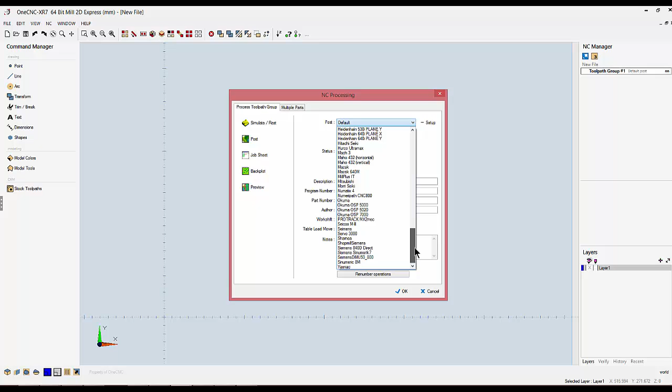If we right hand mouse click on toolpath group, go down to process group, on the top right hand side of that form is where we keep all of our post processes. Everything from Acramatic, Anilam, Bandits, Boss, Fanucs, Hasses, Heidenhains, Hurcos, Shop Mills, Siemens, Mazaks. You just select the post process of your choice and select OK.

You won't notice the post process coming into play until you start looking at your hole operations, when the applicable questions will pop on the screen for your canned cycles.

OneCNC is broken up into three main areas on the left hand side. We have our drawing options along the top section, we have our model tools in the middle, and we have our stock tool paths down below.

There are multiple ways we can work inside of our software. We can use our drawing options, points, lines or arcs to create our own drawings from scratch. We can import customer drawings, DXF, DWG files, and put our cutter paths direct around there, or we can input solid models and extract the edges from the model and put our cutter paths around there.

So we'll start off with creating a drawing from scratch.

OneCNC has a powerful suite of drawing options, from points, where you can create points at arc centers, points along a chain, lines, which will allow you to do horizontal lines, vertical lines, angled lines, tangential, rectangular, parallel offsets, sketch lines or chamfers. And we have arcs, which will allow us to do full circles, arc sketching, arc through 2 points, arc through 3 points, fillets, ellipses, helixes, optimized lines, cardinal splines, B-splines and Bezier splines.

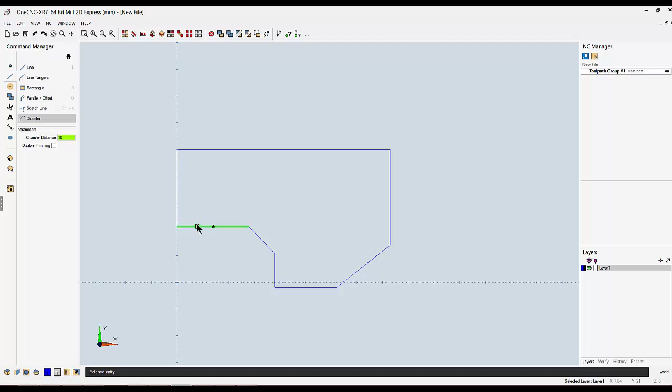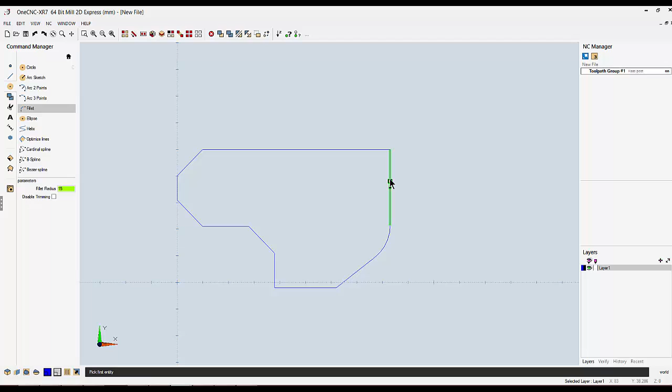As you can see, it doesn't matter whether you work counterclockwise or clockwise. Let's put a few fillets on there. So we're going to arc, fillet, same thing applies. Select the size of your fillet that you want to put on and a preview appears, so you can obviously preview what it's going to look like before you left click to select it. Very quick and easy functions to put fillets and chamfers on.

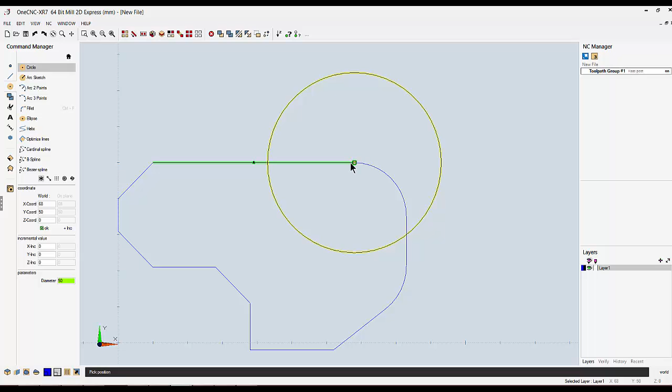When you're working with points, lines or arcs, OneCNC has an intelligent cursor as well. So you can snap to the beginning of lines, you can snap to the middle of lines, you can snap to the end of lines. If I just drop an arc over on the right hand side, just change the radius a bit, you can also snap to the 4 quadrants of the circle. So it makes geometry input very quick and very simple.

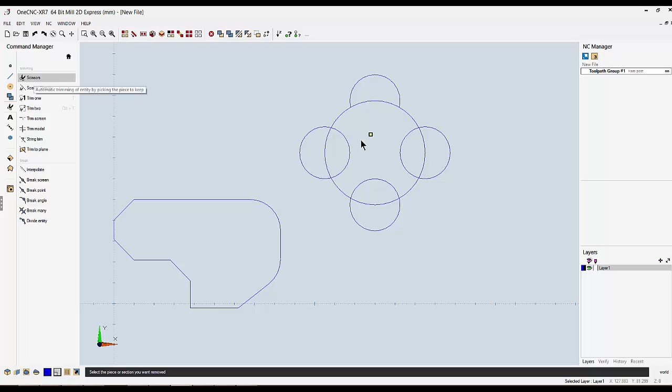Also with our trimming options, several different options available: scissors, scissor sketch, trim 1, trim 2. I'll just use scissors just to trim these arcs back to the nearest intersect point. As you can see, you can create quite complex geometry very quickly.

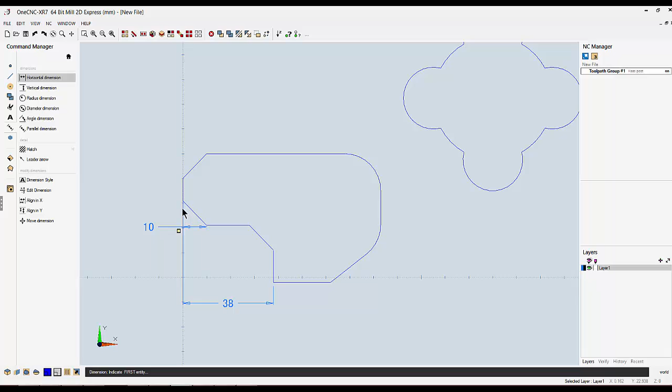So when you've created a drawing, you might want to put some dimensions on there. So go into my dimension options. We've obviously got horizontal dimensions, so you can just snap away to any intersect point. I can just grab hold of the edge of those chamfers as well if I require it. Vertical dimensions.

And radial and diameter, and also you've got angle dimensions in there. So let's just go for a radius.

Now when you've put any dimensions on here, you might want to modify them. You might want to put tolerances on there. So if I'm just going to edit a dimension, let's left click on R15. We might want to put some information after it, so maybe that's typical, we'll just do typ. We might want to change the height of it, so maybe just 2.5.

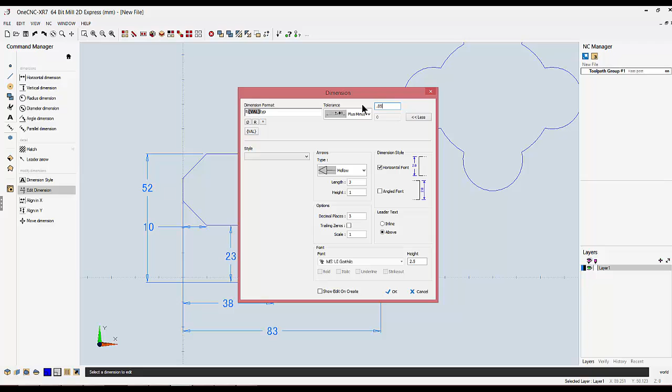And we might even want to put a tolerance on there. So these are our options of tolerances: above and below the line, up and down tolerance, or plus and minus. So we'll just go for plus and minus on this one, and maybe we're going to give it a tolerance of 50 microns, and we can select OK.

So a full suite of drawing and dimensioning tools available. Very quick, very powerful.

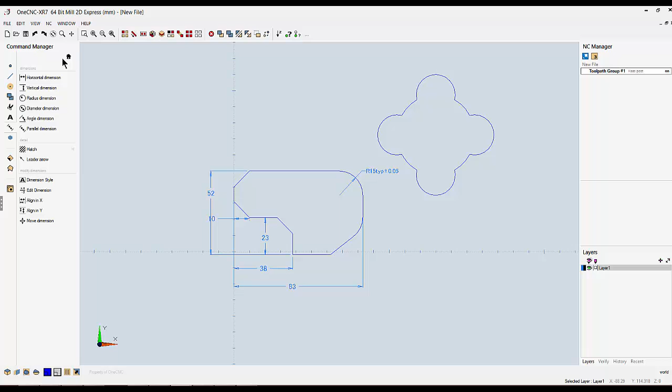Another thing OneCNC comes with is its own library of drawing boundaries. So if we just go into file, we'll bring a file in. As I say, this comes with OneCNC again, all of these files available.

You can import them your own, you can bring these in, you can modify them to suit yourself. And it's just a question of selecting the file size that you want and selecting OK.

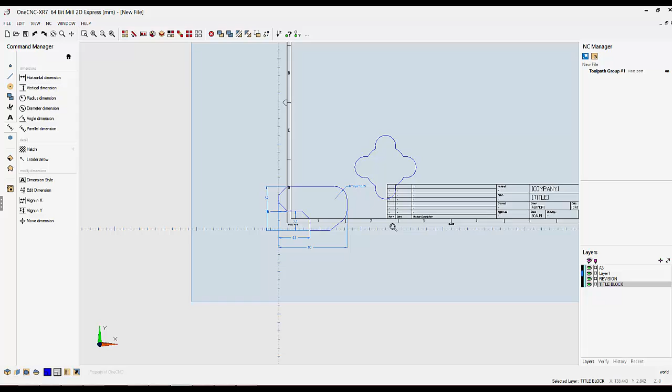We'll just grab hold of our drawing using the color selections. So I'll just grab hold of my drawing, which is in the 2 blue colors, and then we'll just use our transform options and just move that into a more sensible place.

So again, we can modify anything on these standard forms that we bring in. If I wanted to change the title over, I could just go into my text options, I want to edit some text. You simply left click on the title, and we'll just call this one demo for now, and select OK.

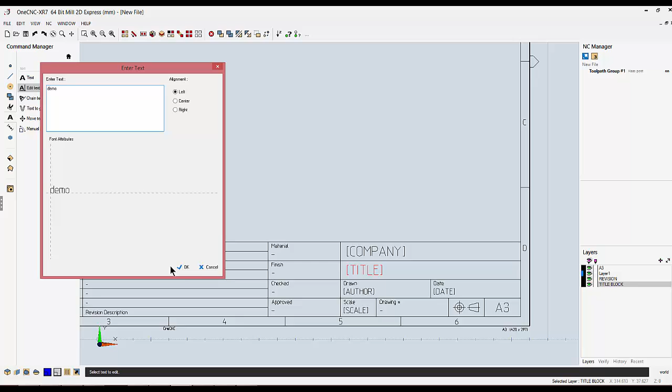Now, as I say, you can fill these in with your materials, your standard tolerances, and you can save them again for use on another part. Or, as I said earlier, you can import a drawing boundary that you already use and drop it straight into our libraries. So very quick, very simple.

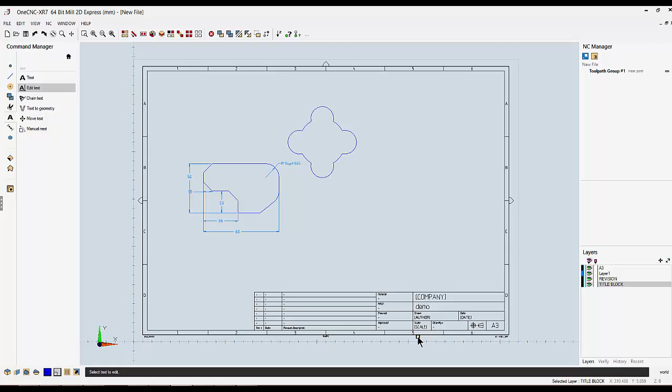So as I said, we can create our geometry using our suite of drawing tools, and we can put our tool paths around there. The other way we can work, or one of the other ways we can work, is import an electronic drawing.

So if we go into Windows, we'll just open up another file, and we'll bring in our customer drawing. So we could obviously put our toolpaths directly around this geometry, obviously providing it hasn't been scaled. In that case, then using our transform options, we could scale it back up.

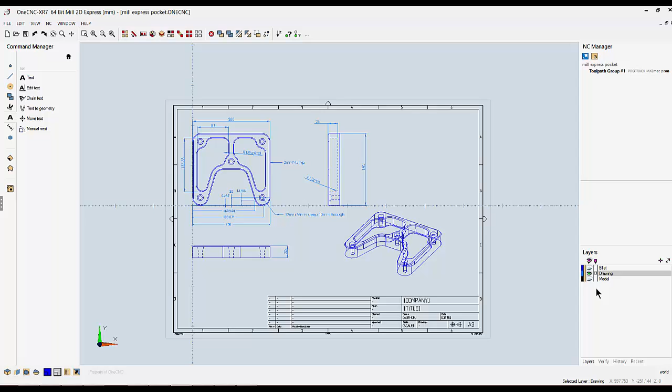Or the third and final way we can work is using solid models. So there we have our imported model that the drawing was taken from. So we'll have a look and see how quick and simple it is for OneCNC to extract the edges of this model and create its own toolpaths.

So as you can see, there are some layers down on the bottom right hand side of the screen. Layers are basically like pages of a book. They're there to make your life easier. The more complex drawings or complex geometry you have on the screen, the chances are that you can pick up the incorrect piece of geometry.

So you can add layers, so you can turn the other things off so they don't get in the way. So I'm just going to add a new layer just by left clicking on the little plus button, and I'm just going to rename this to toolpaths.

Now what we need to do is extract the edges from this model to create our 2D 2.5D toolpaths. For this we use our model tools over on the left hand side of the screen. All I want to do is extract an edge, and I want to extract to give myself a full profile.

So it could be on the bottom of the chamfer, or it could be on the base of the profile. It doesn't matter where you extract these edges from, it's the plane that's sat on the job, which is this XY default plane, that controls the height of the toolpath.

So we're just looking for a full profile. So you hover over an edge and left-hand mouse click. That will then track the geometry all the way around, and I also need the geometry for these two pockets. So again, simply left-hand mouse click and then right-hand mouse click to finish.

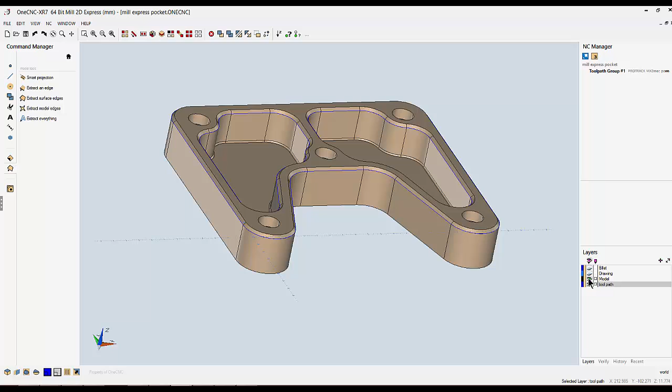So I'm just going to turn the model layer off so you can see what we've just done. As you can see, from a standard plan view, all I've done is create the profiles directly off our customer model. The only thing I haven't done is extract the edges of the holes, though there is a model sat behind here in this layer.

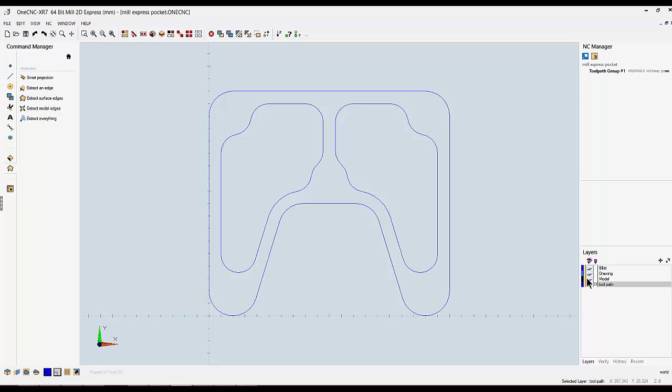OneCNC has an intelligent cursor with a feature recognition system, so it will find those holes for us. I don't need to extract the edge from those holes.

So all we need now is a description of the shape of the billet, and we can use that for two things. We can create a boundary from it to machine any excess stock off the top face, and we can also simulate to it, so we get a very accurate simulation of everything that's going to happen on your machine tool before it even goes out onto the shop floor.

So let's have a look at putting some tool paths around it. We're going to get to our stock tool paths, and I'm going to select facing. As you can see, the prompt at the bottom of the screen is asking me to select the boundary of the face. Well, the boundary of the face is the rectangle, so you simply left-hand mouse click and then right-hand mouse click to accept.

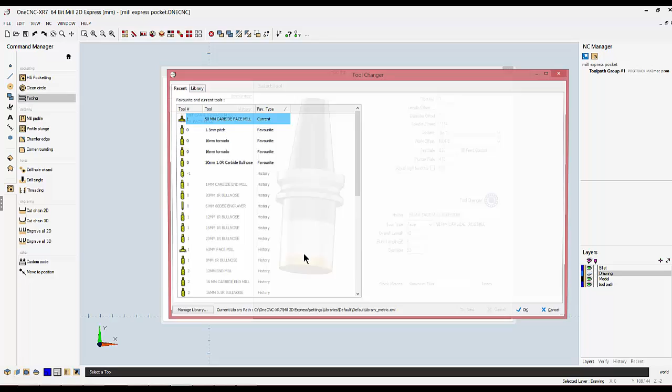Once accepted, it will then take you into your tool selection. OneCNC will also remember whatever tool it used last to do any particular operation. If that isn't the tool you want to use, you simply left-hand mouse click on it, and that will take you into the Favorites tab. Any tool you've got labelled in your library as a favourite, tools you use on a regular basis, you can then pick from here. If the tool you want isn't there, you can simply go into our libraries.

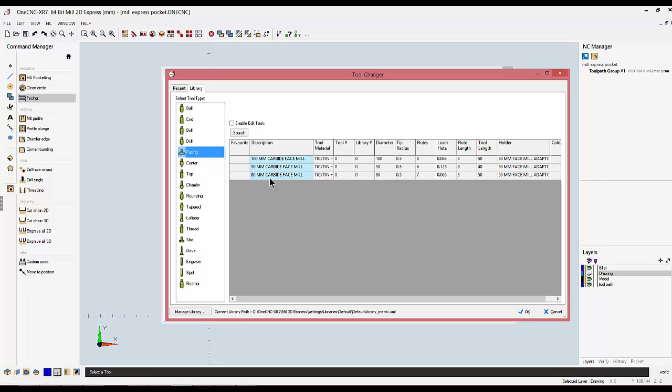Now everything there, from ball end mills, bull end mills, facing tools, threading tools, engraving tools, spot drills and reamers, is completely editable by yourself. You just need to select the style of tool and the size of tool you want to work with. They are very, very simple things to create.

All they need is the material type, a tool number or library number, the diameter and tip radius if it's got one, the flutes and load per flute which OneCNC uses for its feed rate calculations, and then you have flute length, tool length and holder style, which are all completely editable.

You can create your own holders, which it uses for collision detection purposes. So I'm just going to select OK.

You'll have seen the speeds and feeds flash very briefly. That calculation has been made with the amount of flutes and load per flute we've set for the tool in conjunction with the stock material.

If we left click on the stock material, everything there from aluminium, brass, copper, bronze, plastics, all the way down to free cutting stainlesses and titaniums is again completely editable by yourself.

You just need to go into enable editing and you'll see the surface speed requirement and the style of tool, whether it's high-speed steel, carbide, TiCN coated high-speed steel, TiCN coated carbide, cobalt, ceramics, diamonds, taps, drills. You basically select the one of your choice and select OK.

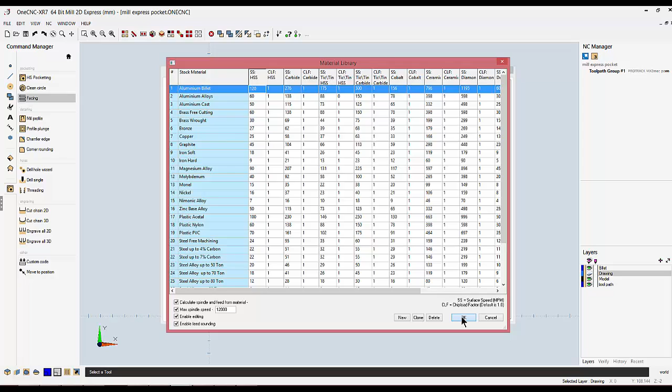Now, just because OneCNC's calculated them out, if you're in a bit of a rush and your libraries might not be set 100% correctly, you can obviously override any feed rate or any spindle speed.

So we'll give it a tool number. Coolant options, none or 1 through to 4, all controlled by post processors. 1 is generally an M08, 2 through spindle coolant, 3 and 4 could be air blast, oil feed, whatever options your machine's got available. So we'll just go with coolant number 1.

Work offset, G54 through to G59 as standard. If you want to use extended offsets, you might want to work with G54.1, G54.1 P2s. You can type in any work offset of your choice. If you work with Heidenhains, you'd be typing in H values. So I'm just going to stick with G54 for this one.

You'll see a fair few toolpaths in our system that have this adjust high feed rate option.

And what that's telling you is when the tool leaves the material boundary to take another cut and all it's doing is changing position, it's not going to go into a rapid move. It will only go into a rapid move if it lifts off from one side of the job and rapids over the other to carry on machining.

So the way to use it is to stick in a box, type in the maximum feed rate of your machine in millimeters, which might be 20 meters a minute. So we'll just type in 20,000.

Each toolpath has an option for notes. Notes will allow you to type in insert grades, any specific information you've got for the setters, maybe sticking out a certain length, using certain form tools. Whatever you want to write in there is visible on your job sheets. So I'll just close it down.

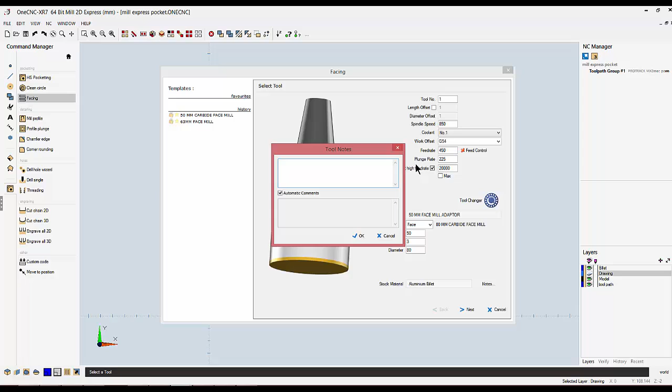And we'll select next.

You get a dynamic view of your drawing to help you out with the start and finishing clearances. Obviously, anything you type in here, the applicable boundary will give you a visual representation of where it is your tool's coming into. So, rapid plane in Z.

How close do you want to rapid off the top face of the part? I'd be quite happy with 10 mil just to start off with. Your plunge clearance is an incremental distance above your material top, and your material top is how much stock you've got to remove off the top face. So we'll just say we've got a couple of mil.

And final point in Z. If you want to leave stock on to go over with another tool afterwards, 0.2, 0.3 of a mil, you type it in there. Just for this example, I'm going straight to finish. Retract at feed speed. Now I want to rapid out.

And material top from geometry doesn't come into play because 3-axis machining, you're plane set on the top of the job, everything is minus. Cut control.

If you remove the tick from the box, it'll take one cut. If you put a tick in the box, if you want to go down in depths, maybe you want a roughing depth of 1 mil, so it'll take it off in 2 hits. And we can select next.

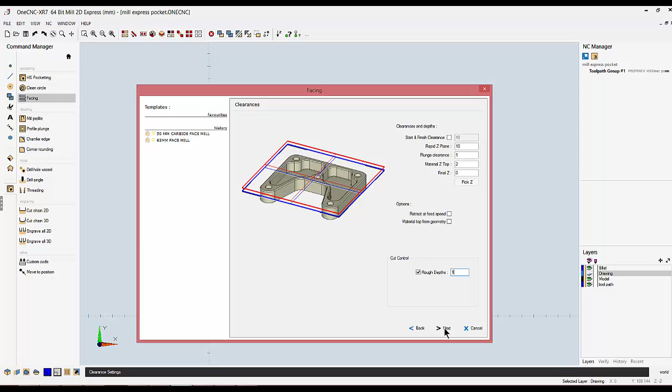Okay, so the approach distance. How close do you want your tool to come in off the boundary? Well, we've set 110% as standard, so the tool is going to plunge in off the boundary of the material, which is great. I don't want it plunging onto the top face.

Overlap amount, if you want the tool to feed all the way off the boundary before it changes direction, again 110%. Toolpath angle, 0 is along the X, 90 is along the Y. I'm just going to go with 0.

And then you have a step over distance. Obviously dependent on your depth of cut, I'd be quite happy with 60-70%. I'm only taking a shallow cut, or you can untick the box and type over a physical step over distance in millimeters.

Toolpath style will allow you to spiral from the outside of the billet to the inside, zigzag from left to right, bottom to top, corner to corner, depending on what toolpath angle you've got set, or one direction. I'm just going to work with the zigzag for this. So I'm going to press finish.

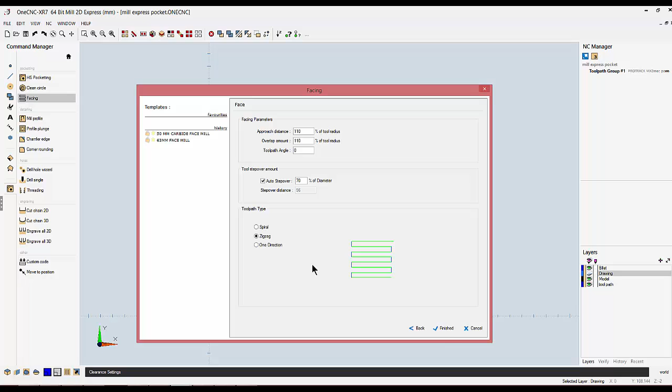And there's our first toolpath on the screen. If I just rotate it around a bit, left click on facing, you'll see the tool is now doing its 2 depths of cut and this blue link line between the green cut lines. As I've told the tool it can leave the boundary by 10% of its tool radius, is where it's going into its high feed rate move.

Now if I just go into edit on this toolpath, you'll notice something else. Each time I create a toolpath, it provides me with a template. Now this is a template that you can use if you have a family of parts, similar parts. So if you use the same diameter tools, the same depths of cuts, speeds and feeds, rather than create that again from start to finish, you can simply left click on the 80mm carbide face mill, which is what I've just created. You can also customize them and name them yourself, which we'll have a look at a little bit later on. So for now I'm just going to close that form down.

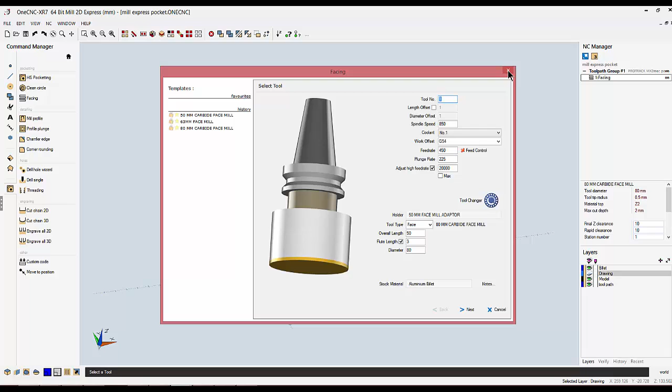Okay, so let's have a look at machining this outside profile. For this one we're going to use high speed pocketing. Again, the prompt down the bottom, we can select the closed or open boundary. Well, the open boundary is going to be my material stock, and the boundary, the island, is going to be the main profile. So we right click to finish.

And what we'll do is we create a template for this one in our favorites.

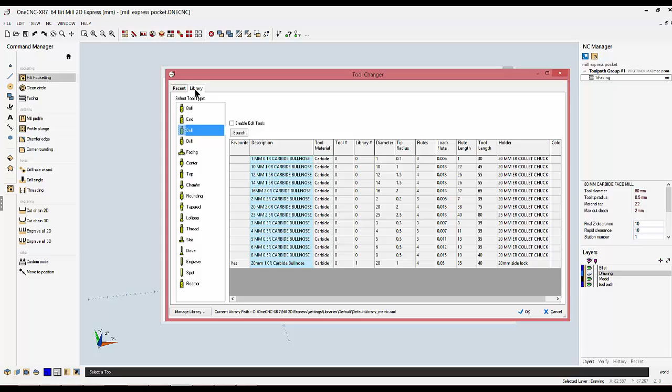So I'm just going to save the setting, and let's call this one 20mm diameter, high speed open, and select OK. We're going to change the tool over in the libraries and grab hold of a bull end mill with a 20mm diameter.

Any tool you bring in from the library, you can modify. So maybe I just want a 0.5 radius on the end for a bit of strength. If it's only sticking out 50mm long, for collision detection I can change all of these. So we'll give it a new tool number.

Quite happy with speeds and feeds, and you'll see a feed control option. That is the most restricting part of any toolpath. You might be able to run at 1 meter a minute on the linear moves, but have to slow down to 200 or 250 millimeters a minute in the corners, so it doesn't squeal.

This allows you to look into the corners at a given distance, either by a percentage of the tool or manually in millimeters. I'll go with 25%, and it'll allow you to slow down on certain size arcs, again either by percentage of the tool or by typing in the radius you want to look for. If I could run at 1 meter a minute on linear moves but had to slow to 250 millimeters a minute into corners, that's a reduction of 75%.

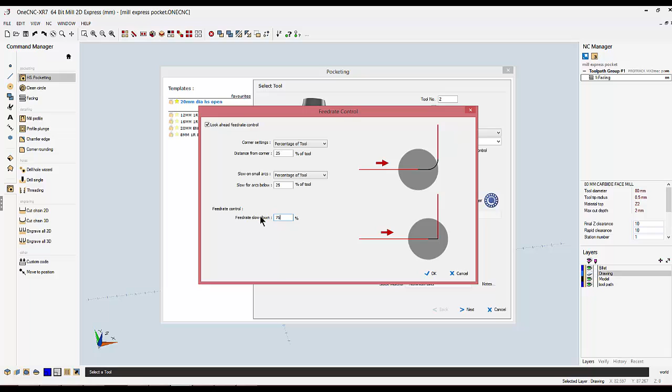So we can select OK. As I said, I reckon I could get away with 1 meter a minute on the linear moves, so we can select next.

Rapid plane in Z, I'd be quite happy with a couple of mil. Plunge clearance, quite happy with 0.5. Material top is 0. Final point in Z, if we weren't sure, we have a solid model sat behind in the background, so I can select Pick Z.

I can find an anchor point at the bottom of the model and left click. That's telling us we're at -30. I've got a bit of a protective edge on this tool, so I'm just going to override that and go to -31, and I'm going to select next.

We can stay with inside the boundary with high speed closed, or start outside the boundary with high speed open. Traditional is a style of toolpath you'd normally get pocketing on a conversational unit, and you also have a high speed zigzag. So we're going to go with high speed open.

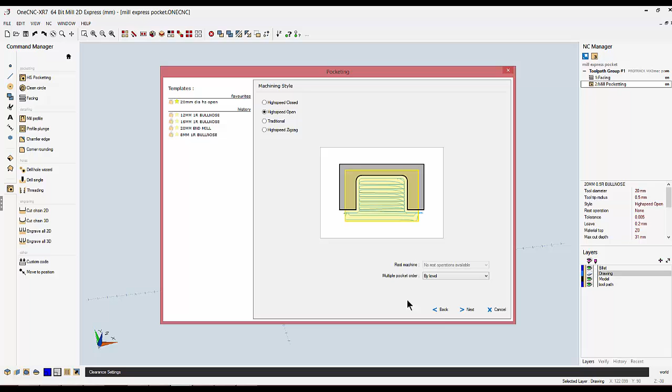Do I want to leave anything on the sides? Well, yes, because I'm going to go around with a finish pass afterwards, whether with the same tool or a different tool, but I want to leave stock on there. Tolerance of the toolpath is fine with 5 microns, and if you have a draft angle on a part, you can give it a wall taper.

So I'm just going to select finish. Give it a few seconds to calculate out the toolpath, and you'll see the tool is radially moving in at its 20 to 30% radial engagement, which I've given it. Again, the blue link line in between the green cut lines is where the tool is going into a high feed rate move.

So let's have a look at machining these pockets. I'm going to go with high speed pocketing, select both of these boundaries, and right click. Again, I'm going to create myself a template for this one, so I'm just going to tell it to save the settings.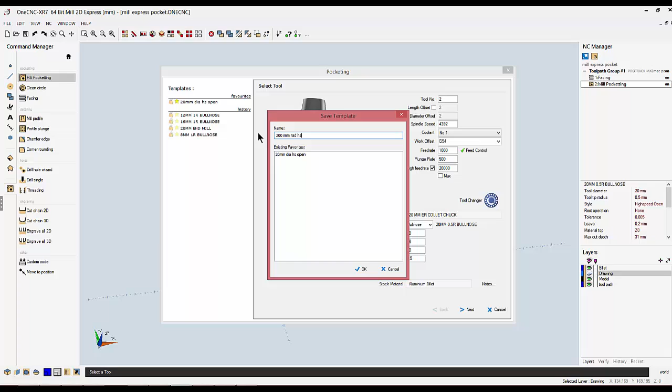Again, I'm going to use a 20mm tool, this time with a 1mm radius, and I'm just going to call that high speed closed, and select OK. So we can give it a new tool number, and just modify the radius on the front page to 1mm.

Quite happy with the speeds and feeds, so I'm going to select next.

Final point in Z, just going to use Pick Z. Find a base of the pocket at -25, and we can select next again.

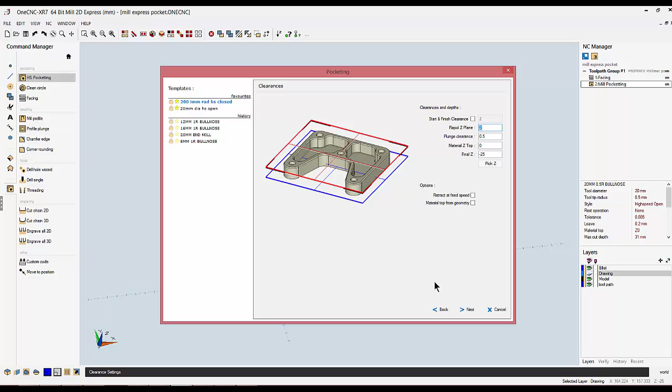This time we work into closed, stay inside the boundary. You can plunge or you can ramp.

Well, if you've got a pre-drilled billet, been out to heat treatment possibly, or a casting where you've got a specific place you want to start in, you can use plunge, and you can force the machine to take an entry position of your choice. I'm going in with a solid part, so I'm just going to get OneCNC to sort it out itself.

Again, if you want a ramp helix, you can force it to start in a position of your choice just by drawing an arc on the model where you want it to start.

Ramp angle, be quite happy with 3 degrees. Helix diameter, let's say we're going to go in at 15 mil. It gives you a minimum and a maximum diameter, and I normally go about halfway in between.

Step over distance, again, let's say the tool can do 30%. I want to leave stock on the sides, not really leave anything on the bottom, just so you can see the finished profile a little bit easier. And I'm going to select next.

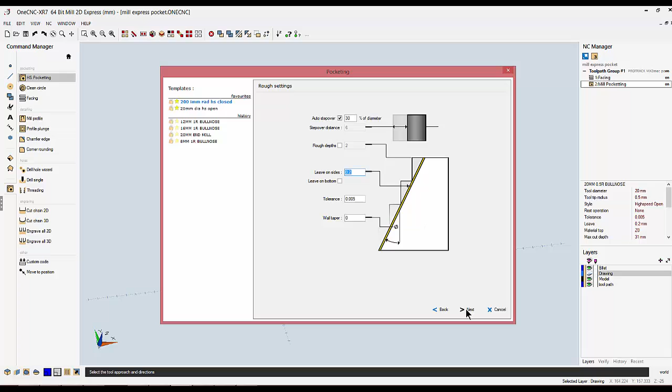Finishing options, as I said, if I want to go around with the same tool afterwards, and why not? Let's go with the same tool. I'm just going to say finish around the bottom only, and compensation, so we've got G41, G42. We're going to use wear away, and we're going to select next.

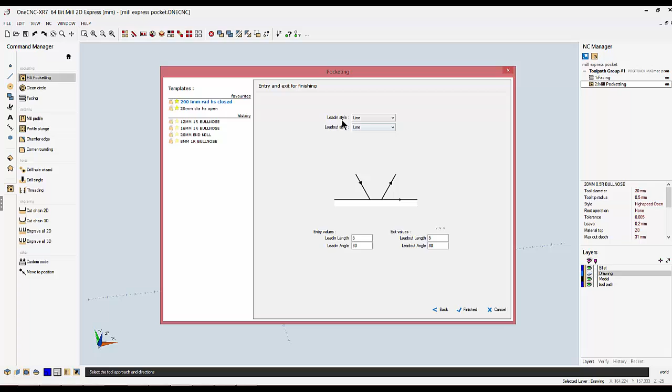Entry and exit, I'm going to use line and arc for both. Lead-in radius, I'd be quite happy with 3 mil. Lead-in angle, quite happy with 90 degrees. Start line length, just a couple of mil just for a bit of safety. And I'm going to copy those over to the exit values, and I'm going to select finish.

Now we have our 2 pockets high-speed machine closed.

So let's finish mill this profile. So we're going to go for mill profile. We're going to give ourselves a start point, give it a direction. That will then track the profile all the way around and take us straight into our tool change. So we're going to change the tool over in the library.

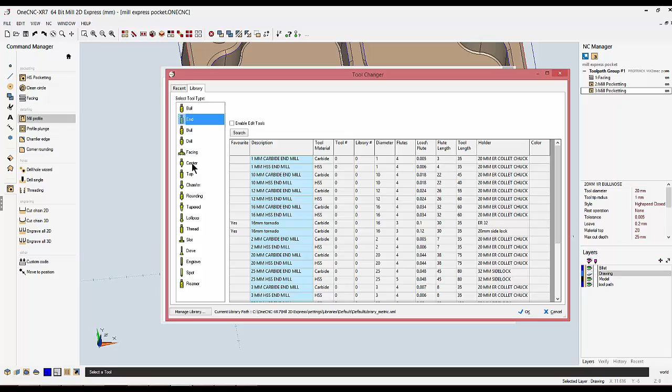Let's say we're going to use an end mill, let's say we're going to use a 16 mil diameter and select OK. So we can give it a new tool number, speeds and feeds.

Final point in Z, again, we could use the Pick Z if we'd forgotten it was minus 30 mil. Maybe just go a little bit past, minus 30.5. And we can select next.

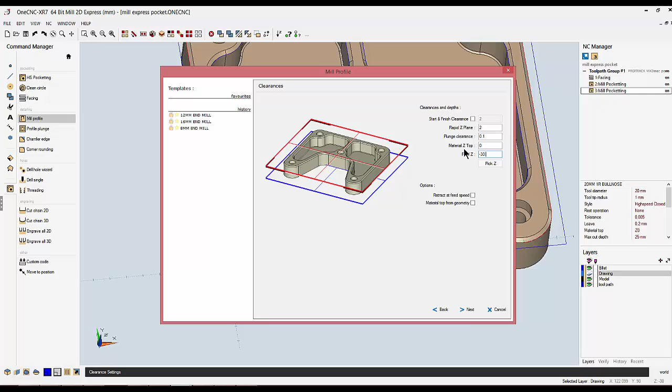Cut levels or ramp, well, I'm coming in outside the material, so I'm quite happy with cut levels. Step over distance doesn't come into play unless you're using remove amount, which is a roughing cycle to take any excess stock away. We've already removed the excess stock with a high-speed pocketing option.

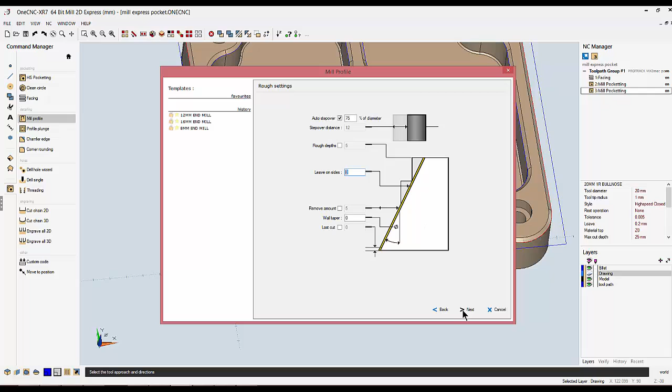So do I want to leave stock on the sides? No, I don't. So next. Finishing option, I've got plenty of flute length, so I'm quite happy at the bottom of the profile, bottom only, and compensation options at control, so I've got G41, G42 cutter compensation.

And next. The overlap amount is a distance from when the tool engages the profile to when it leaves the profile, and that's just to help improve your blend in, blend off. Lead-in radius, again, I'd be quite happy with 3 mil with a 90 degree approach and a couple of mil start line length. So I'm just going to select finish.

So let's have a look at just putting these chamfers on. I'm going to go for chamfer edge. Again, I'm going to select the base of the chamfer, give it a direction with the arrow, and right click to finish. Okay, I'm quite happy with the chamfer tool I've already got in there, so we'll just give it a new tool number, and we can select next.

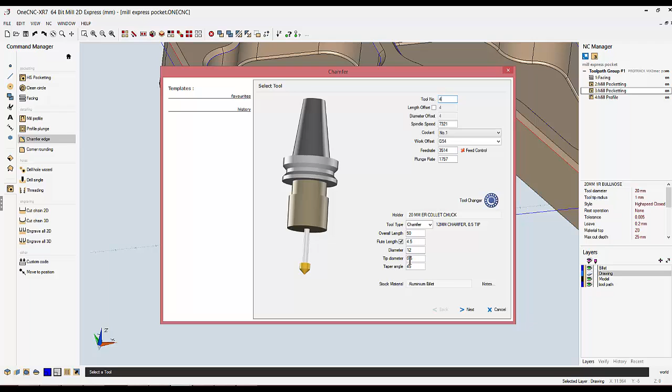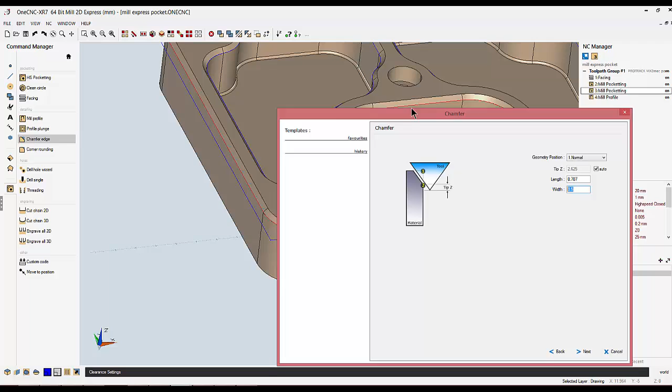Quite happy with the clearance form. And as you can see, you have position number 1 or position number 2. Well, if you're just putting a small breakage on a model that hasn't got a chamfer built onto it, you use position number 1 and you just simply give it the size of chamfer that you need. We're working to an extracted edge off the base of a chamfer, so we're working to position number 2.

So we swap over to bottom, and all we then need to do is give it a distance. You want the calibrated edge of the tool to go past the edge of the chamfer, so we'll just say 1 mil, and we can select next.

Lead in lead out style, be quite happy with line and arc again. Lead in radius, 3 mil, 90 degree approach, couple of mil start line length, and we'll copy those over to the exit values.

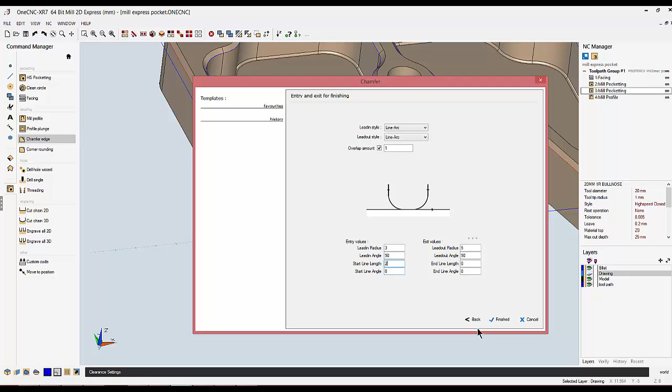So we've had a look at creating templates for high-speed machining and profiling. Let's have a look at creating a template that can be used on another part for doing these 5 holes.

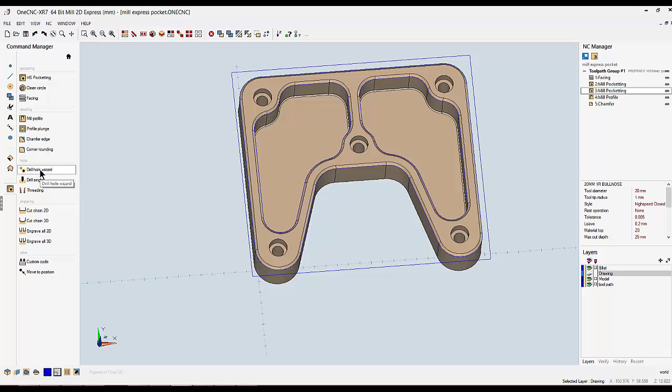Okay, so we're going to go back into our stock toolpath. This time we're going to use Drill Hole Wizard. If I just move that form out of the way, you can see what it's done. It's found 5 holes and two radius in the corners. Well, they're partial circles from geometry, but all we're really interested in is those 5 holes. As you can see, it's telling us it's got a 10mm diameter bolt hole, 8mm deep, down to -30. So what we have there is a counterbore, and the smallest hole is 10mm.

So we're going to accept those holes, and select next. We're not using material from Geometry Top. We'll have a look and see what that does on another sample. I'm just going to turn that off, I'm just working on a flat area. Start point in Z, I'd be quite happy with 5mm. Rapid plane in Z, I'd be quite happy with a couple. Plunge clearance, I'd be quite happy with 0.5. And material top is 0. We can select next.

Okay, so we want to spot drill it first. So I'm just going to left click on center, then double click on center, and we can select our tools. I'll be quite happy with that for the first tool, so we'll give it a tool number. Quite happy with the speeds and feeds, and we can select next.

So you've got machining cycle and automatic drilling. Automatic drilling is G-code output. Machining cycle brings in your post-processor. So we'll have a look at machining cycle. Hole depth, going to use absolute. I just want to put a little spot in there, so we'll just say -3mm, and select next.

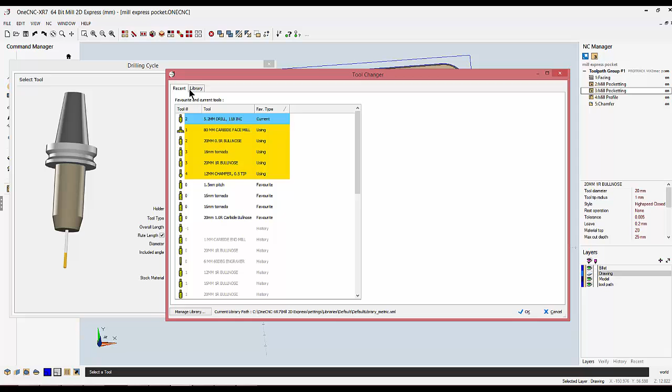Okay, so I want to drill it next. So I'm just going to change the tool over in the library. Let's grab hold of our 10mm drill and select OK. Give it a new tool number. We're going to use machining cycles.

Still working absolute. The part is 30mm thick. May have 3 or 4mm in the vice jaw. Probably want to go all the way through it. So let's say the billet's 35mm. I'm just going to say -35. That is the point depth, as you can see from this little icon. If I want full diameter drilling, the option to drill through at 35mm, you just put a tick in the box. You'll see the icon change. You're now doing full diameter drilling, drilling through full diameter at 35.

I'm going to let this drill peck, so I'm going to use a G83. Peck depth I'm quite happy with, say 6mm. Retract mode of G98, and finished.

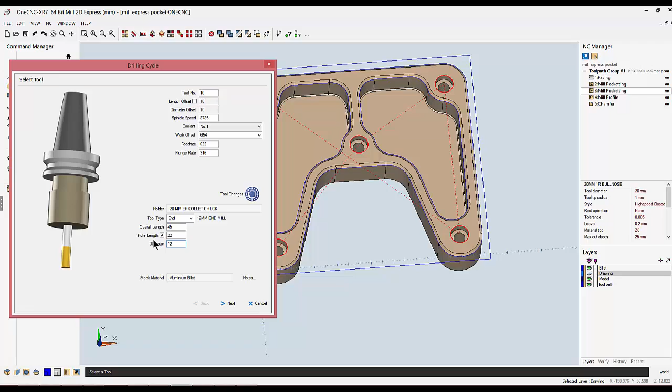And let's just put this counter bore on the top. So I'm just going to select counter bore. I'm going to change the tool over in the libraries. Let's say we're going to do this with a 12mm cutter. So we'll give it a new tool number. Quite happy with the speeds and feeds.

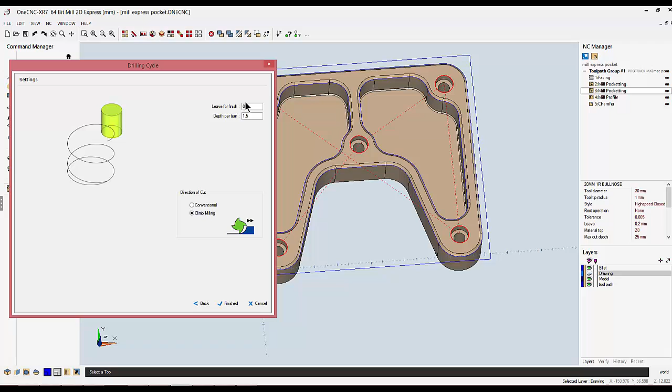And I want to helically mill this one. So we've got a diameter of 16mm. Absolute, we're going 8mm deep, so -8. We're just doing this as a finishing cycle, so I'm going to leave nothing for finish. Depth per turn, let's say 1mm, and finish.

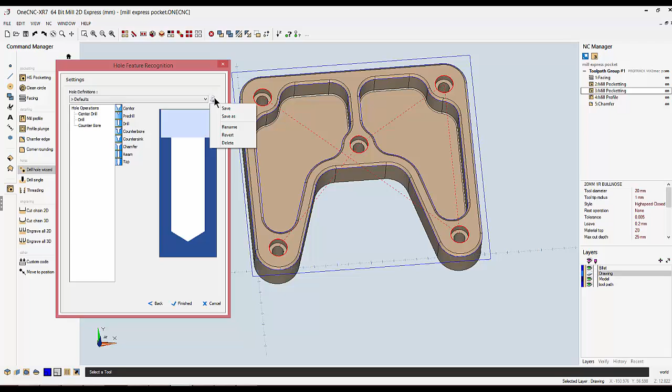You get a cross-sectional view as you're doing this, so you can keep a close eye on it visually. And as I said, we're creating templates, so we can use this on another part. So I'm just going to select Save As, and I'm going to call that 16mm counter bore, 10mm hole, and select OK. That will be in your hole definition, so you can select any previously machined hole from this area, and that will drop it straight into your program. So I'm going to select finish.

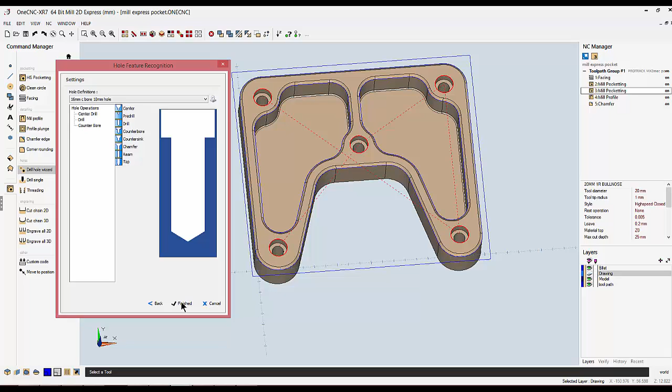So let's have a look at simulation. I'm just going to right click on my toolpath group, going to simulate rest. I'm simulating to a boundary. Top of the job I said I had a couple of mil on there. Bottom of the job we said was 35mm. All we need to do then is select the boundary for the simulation and right hand mouse click.

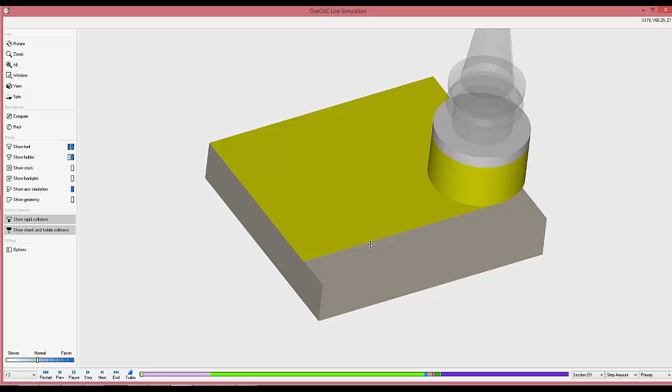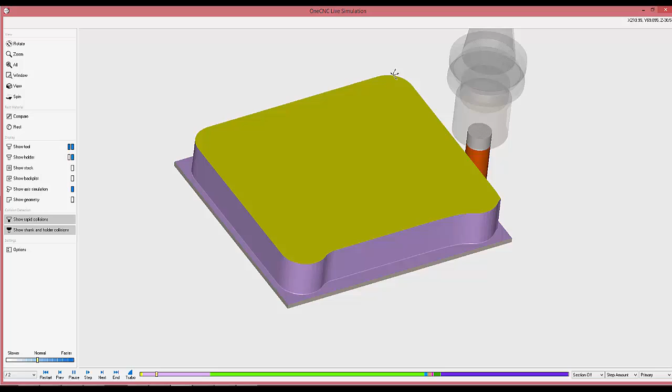Now we can obviously speed the simulation up or slow it down on the bottom left hand side of the screen, and you'll see the tool radially moving in at its 20, 25, 30% radial engagement, whatever you've set. So you get constant load on the tool at all times. You're utilizing the full flute of your tool, so you're not just going around at 5-10 mil, reducing the first 10 millimeters of your tool to nothing, so it either needs chopping off. This way you can send the entire tool off and just have it refurbed. So it's a very efficient way of using your tooling.

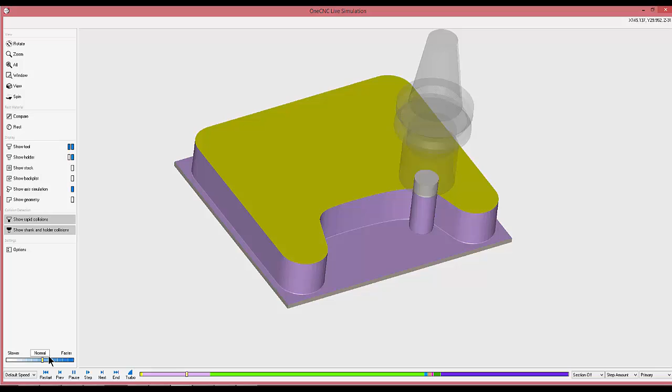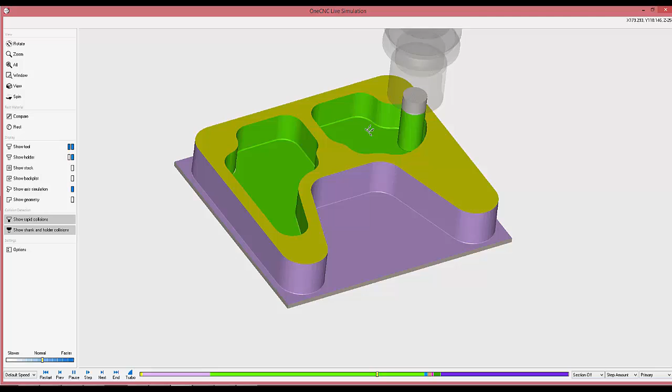The whole thing's being collision detected, the length of the tool, shank and holder. As you can see, it's just radially moving into those corners. Where the tool changes into that light brown at the bottom of those pockets is where it's going into its high feed rate move. It will only go into a rapid move and turn red if it lifts off the pocket and goes to remachine somewhere else.

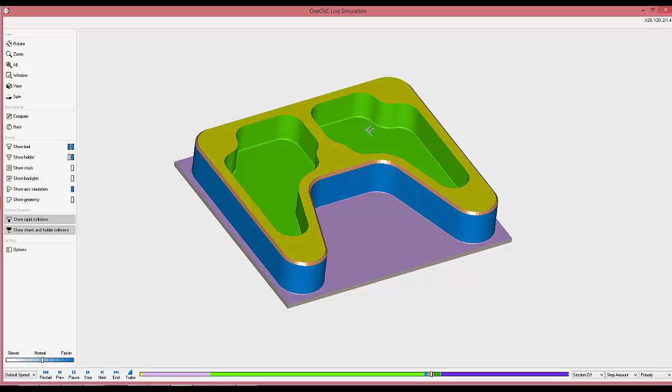Finishing around the pockets and now finishing around the outside profile. Just putting the chamfer around the outside profile. Spot drilling and counter boring those 5 holes.

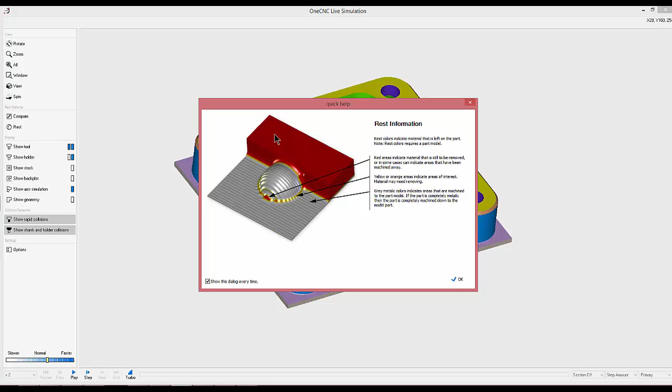When you've got parts with a lot of options, a lot of operations and features, things can get missed. We have an option for rest, and basically rest compares what you've done back to the model you've got in the background. It shows red for an excessive amount of stock left on, yellow - it uses the term areas of interest, meaning not quite right, go back and have a look - and grey is completely machined to model. So when I select OK, it's just going to compare itself back to the model and show me what I've got.

Now, as you can see, I've missed those 2 chamfers. Obviously the bottom of the part is red because that needs flipping over and machining off, but you can see straight away, before this program goes out to the machine, that I've missed something off. So I'm just going to go back and put that right.

Now, editing programs is really very simple. I'm just going to right click on my chamfer option and repick path, then give it the start point again for the outside boundary. I can then pick the inside boundary, both sides, and right click to finish, and now I've got a chamfer going all the way around that part. So the job is now ready to send out to the machine tools.

Okay, so let's get ready to send this out to our machines. I'm going to right click on the toolpath group, go into post group, and we're going to grab our post processor. We initially said that I was going to do this with a Haas machine. Description, we'll just call this one demo. Program number, obviously whatever program number you like. Part number. The author is me, I've logged onto the system.

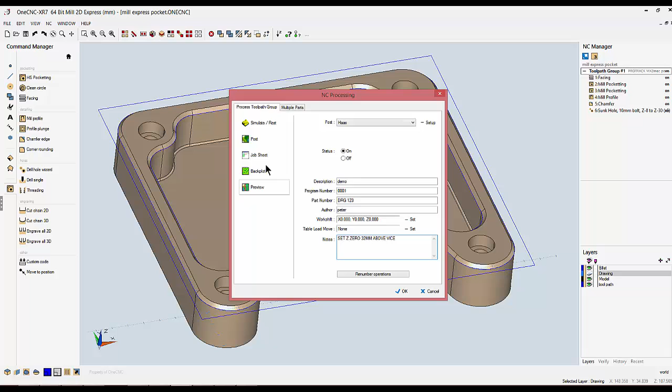And then we just select job sheet. We'll just view that as a PDF so we can go through it.

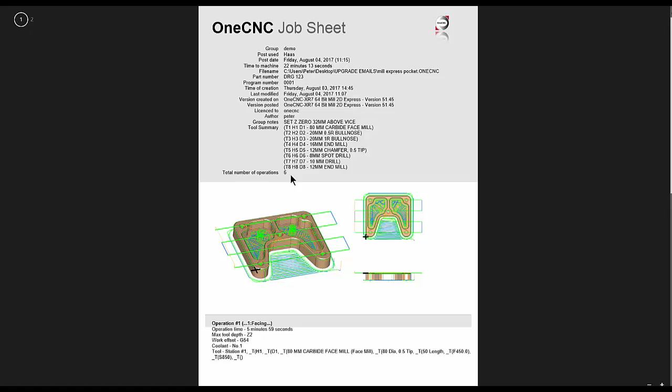As you can see, all the information we put at the top - demo, post, program numbers, drawing numbers - gives you cycle time from start to finish, so it's a good bit for quoting. Group notes, anything you typed in there is visible by your setters or operators. It gives you a tool summary with the amount of operations. If you make a mistake in your tool numbers, it will come up here with an alarm saying duplicate stations are being used. If you then scroll down a bit further, you can see it gives you a crosshair to show you where the datum of the part has been set, along with the model and all of the tool paths going on the part.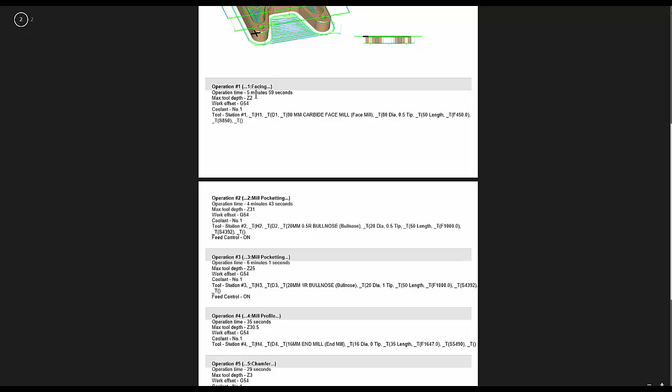As you carry on scrolling down, you can see it breaks each individual into the operation time, the maximum depth the tool is going to be going, the work offset being used, and all of the tool and station information. So we'll just close that down. You can obviously print it off or save it to your customer folders, and we can then post.

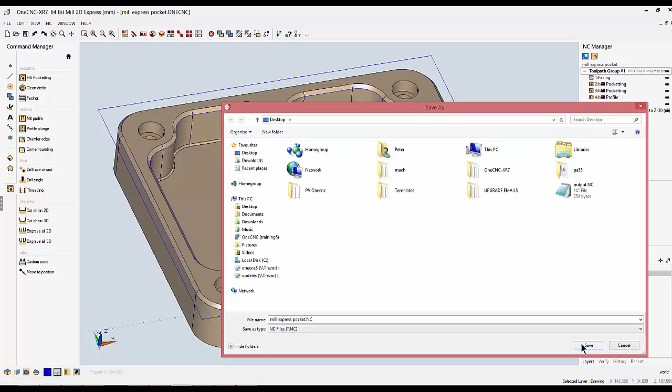First thing you need to do when you select your post processor is just make sure the file extension is set correctly. So as I'm posting out with a Haas, it'll be .nc. You can obviously redirect this program wherever you like - customer folders, flashcards, memory sticks - and then you simply select save. OneCNC will then bring out all of the G code applicable to your machine tool.

So there we have a job from start to finish: importing a solid model, extracting all the edges round, creating ourselves a tool sheet, and visually checking the simulation. So let's have a look how these templates can improve our setup or speed of programming on other parts.

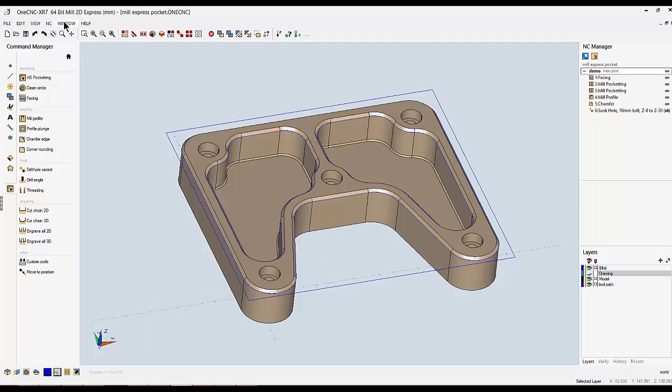So let's bring in a similar part. I've already put some geometry around those parts just for the billet size and the profiles. But as I say, this is a family of parts. They are pretty much the same material and tooling. So first thing we want to do again is high-speed pocketing.

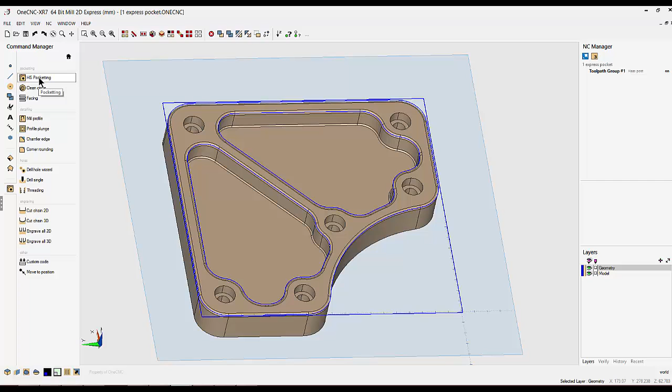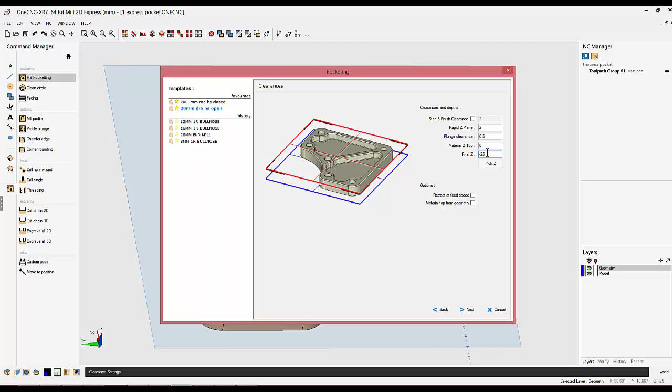So when we select the high-speed pocketing, the boundary and the island, we're now going to use our 20mm diameter high-speed open tool. You see the tool change, all the speeds and feeds. I can just push through this form. I obviously need to check the depth of the profile, so I'll just drop down and check the depth. Slightly shallower in this case, -25, so we'll override it and tell it -25. As I say, all the rest of the information will remain the same. Quite happy with the plunges, quite happy with the speeds and feeds.

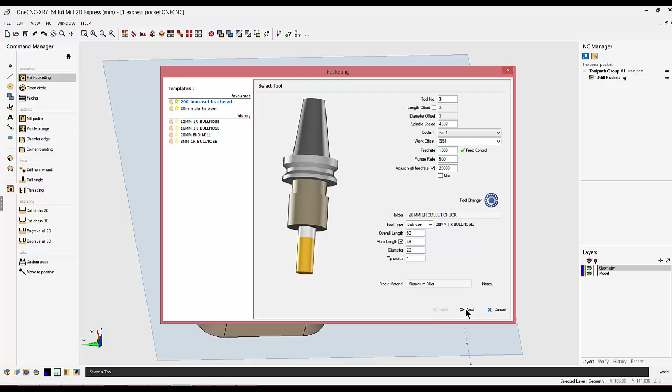So as for the two pockets, we're going to go back into high-speed pocketing. We're going to select the boundaries for the two pockets. We're now going to use the 20mm closed, and again we're going to push through this form, making sure we check the Z depth at the base of that pocket. Slightly shallow again, 15, but apart from that I'm quite happy with all the information OneCNC has been collecting inside these toolpaths.

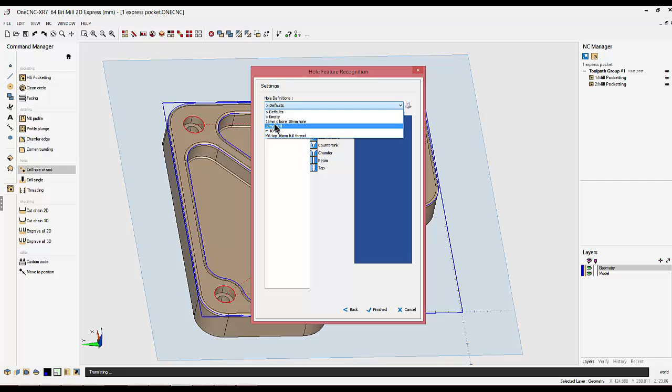And as for the holes, drill hole wizard, you can see the hole size is the same. Quite happy with my clearance form, so I can just drop straight into my hole definitions and select the 16mm counterbore and select finish. And you can see very quickly you are building up a program without any effort whatsoever. So it's making your programming times far more efficient, and with those high-speed toolpaths you will be increasing the efficiency of your machine tools.

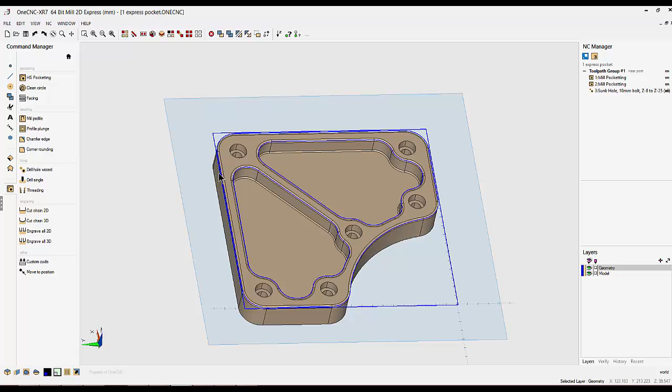Now these holes are all on the same Z level. Let me show you how holes via geometry works. So if we bring in another option, you can see this has got 8 holes of similar size, but they're on different Z levels. When you work with a model without any extracted geometry, you would need to do that in two separate cutter paths, one at the top of that plane and one at the bottom.

The difference is you now use the geometry that you extract off the top of the holes as the zero for the start point of your holes. So we're going to go back into Drill Hole Wizard. As you can see, it's found all the holes in there, 5mm diameter, 10mm diameter, and the 5mm ones on the base. So I now want to select both of those hole types and select next.

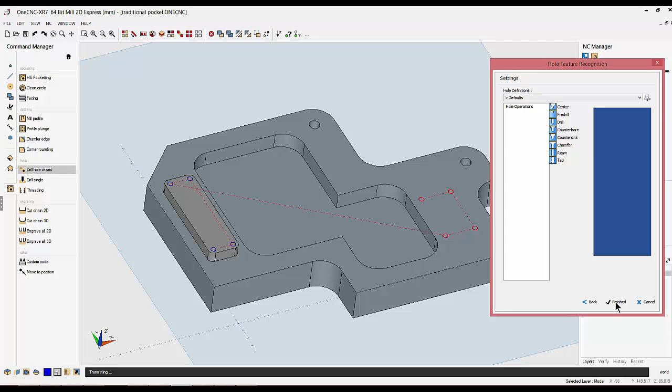Now we're not working on a flat face, we're working using geometry, so we simply select use from the material top. I've already created this hole once, so I'm going to grab my M6 tap and select finished. And as you can see, it then puts those holes in according to the height of where that geometry starts. So even if you're only spot drilling various different sizes of holes, again it makes your programming time a lot quicker.

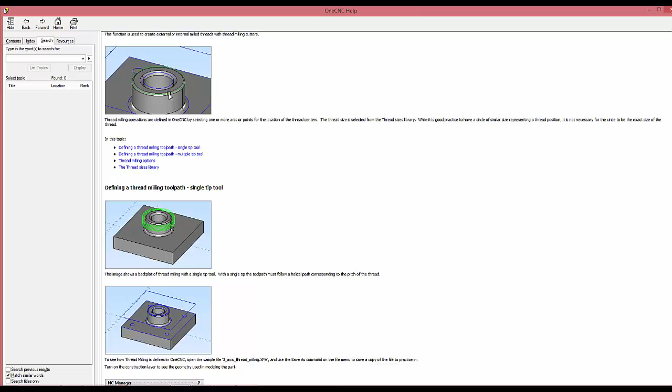Now due to time restraints, obviously I can't go through everything that this version of software is capable of doing, but there are help functions built in for every icon on the screen. If you're not sure how to do threading, and a lot of people need reminding until they get familiar with the software, you can simply left click on threading, press F1 on your keypad, and it takes you straight into a tutorial on how to thread mill. Now this tutorial is available for every icon, as I said, on the screen.

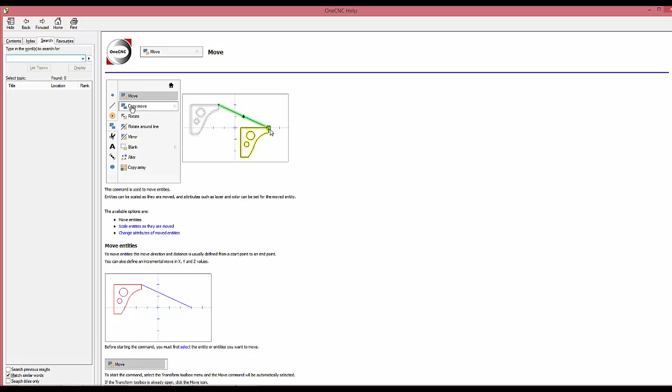It helps learning the software so much more easy, whether it's for toolpaths, whether it's for dimensioning, whether it's for your transform options that allow you to copy, move. Again, you just simply left click and press F1. Now, because there are several options available inside the transform options, you don't have to escape out to see what copy and move does. You just simply left click on these other options. They are all now live.

Well, as I say, I can't possibly go through every option that's available in OneCNC XR7 Mill Express, but as you can see, it's a very powerful drawing and toolpath version.